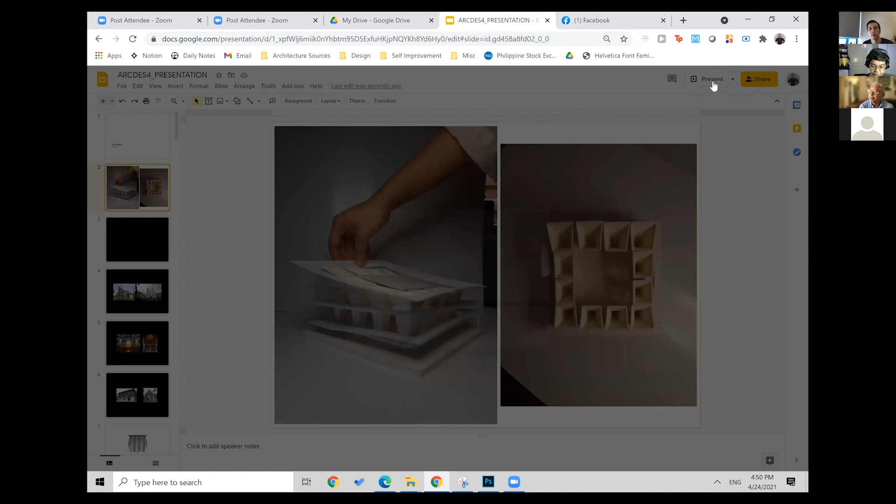Trace, I'm just going to ramble on with my thoughts about your project. You just put up images that you think are relevant to what I'm saying, but there's really no order to how I say my comments.

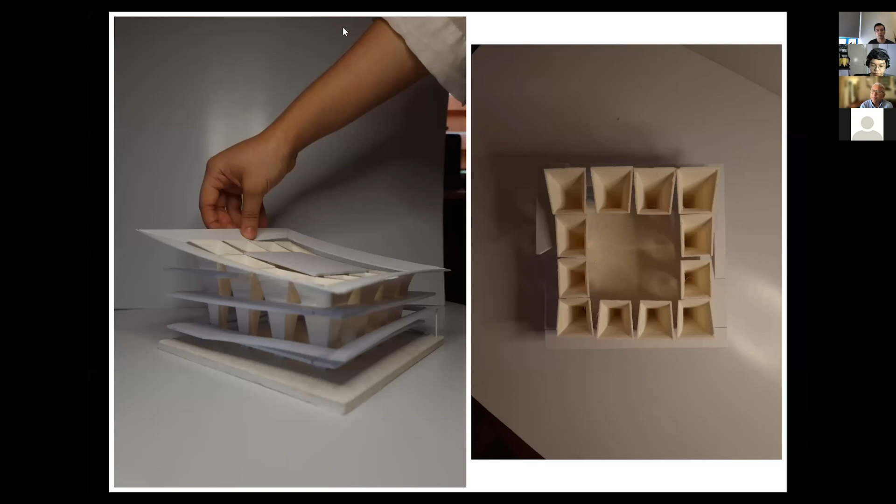Your church, as I said, is going to be like a garden as well. I like that you chose very simple yet hardy plants for your church. As I said at the beginning, the type of plants you choose is crucial because how the plants flourish will determine the success of your project.

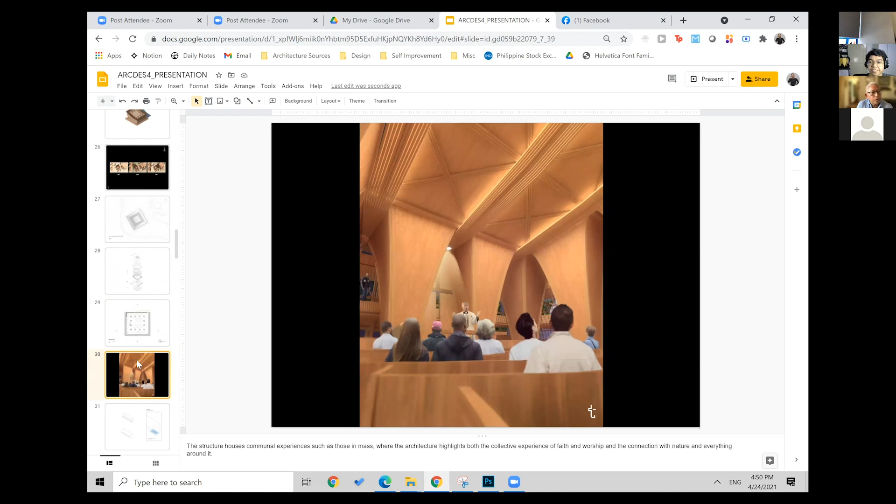I also like that it's open and that you're trying to be organic with your materials. It goes well with your vision of the building as also a farm, and I appreciate that part—also the sounds of bird song.

You showed us five types of bird species. Are these birds endemic to the country? Yes, sir. These are endemic and they're dominantly found around the village.

Every morning—actually my original site was next to my house, and then I transferred to the clubhouse because of the expanded space and the location of the churchgoers, usually originally on Sundays. It's in the clubhouse, so the proximity was just perfect, and I was able to transfer from my original site to the area, and it still has the birds.

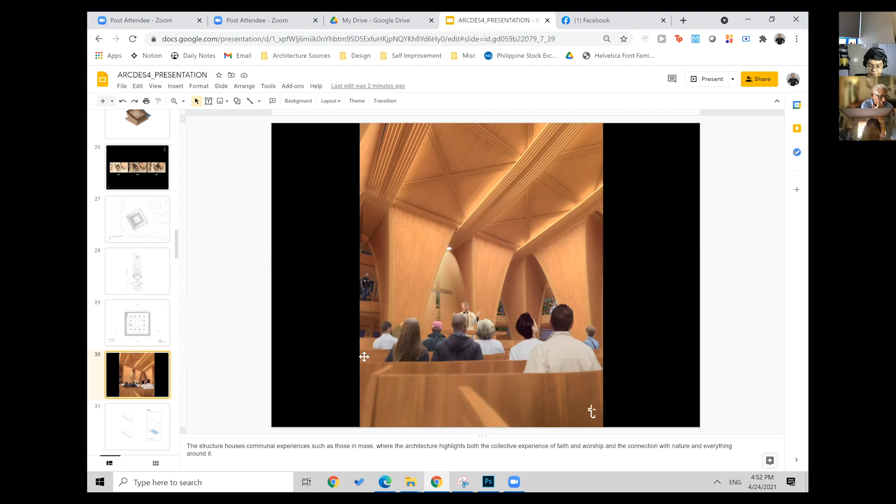Same birds. Yeah, it's good also that you're thinking of preserving rain through your catchment because that can be reused—of course, since you're doing something like a farm.

I like that you have levels in your building as you go up the ramp. There are certain levels that people can sit on if they want to rest, if they just want to relax.

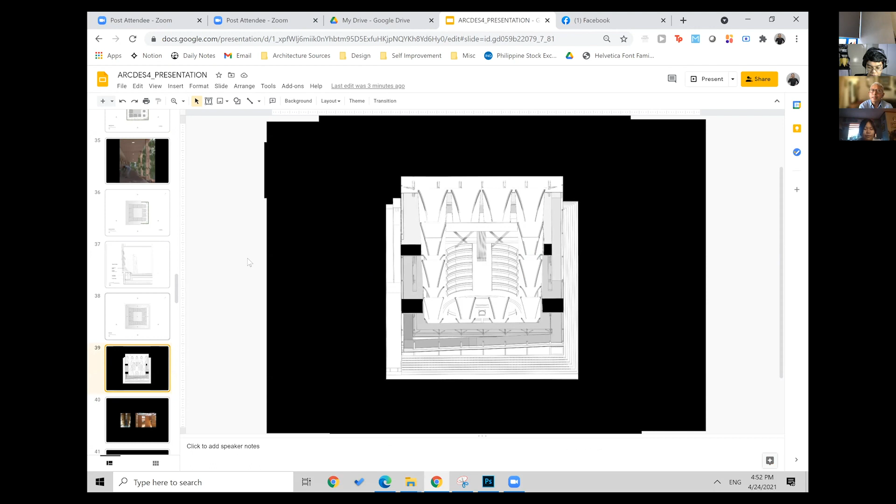It brings us somewhat to a Southeast Asian tradition of the papag, which is just a flat surface that people sit on—sometimes they even eat and do other activities on it. So yeah, I like that you have these flat levels that people can use.

The drainage, the gutter—can we go to the roof system? Yeah, the drainage and gutter design is something I think is quite good.

Do you have that drawing, Trace? Is it an axonometric or the plan on top? This one, I think.

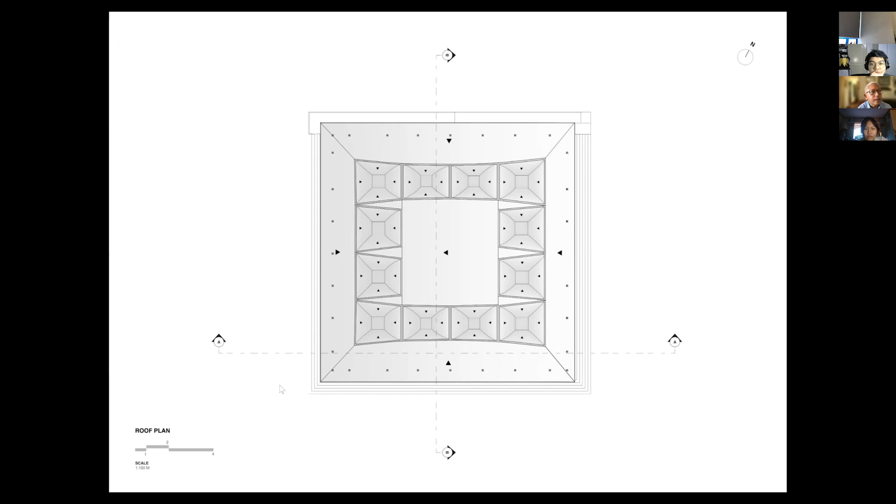Where is it? I don't know if you have a gutter system that you designed. It's here in my notes. Okay, the gutter system—I don't know if there's something specific I should touch on.

Okay, but anyway, now that we're here in this image, I like that idea of having holes on the floor for wind to go through. Although I wish you'd push it further by having more holes, because I think you can still do that.

This reminds me of the community pantries that are happening now. Maybe your building can develop into something like this with the produce that you have.

I have a question about the reservoir volume on the ground floor—is that going to be sufficient for the plants?

I was wondering if the area of the reservoir is not too big for the amount of water you're going to get from the rainwater.

Plants typically need about 25 liters, and imagine having it trellising all the way up—most of the plants heavily need water, given the storage, since not all seasons have rain.

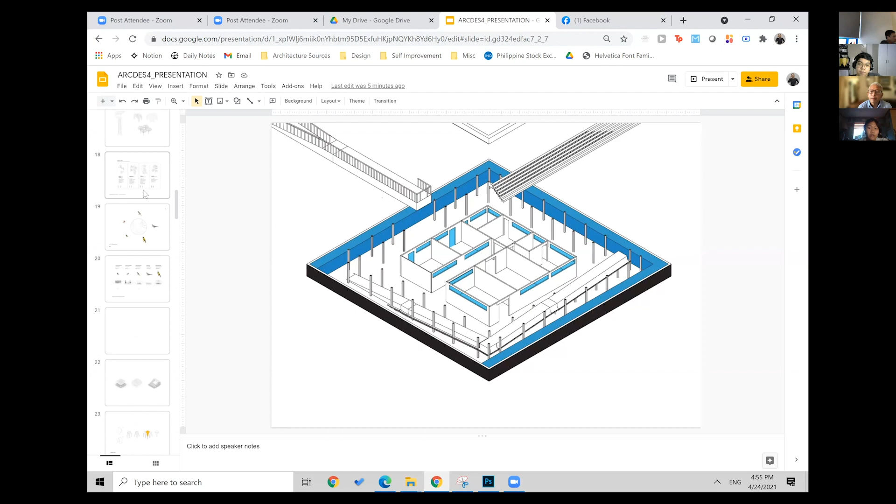During the dry seasons, yeah. So having this as a kind of long-term storage is primarily for the plants—that was mostly my goal for the project, in order to take advantage of the fact that they grow abundantly annually. As you can see, all the plants I picked are local and endemic.

How will the water be accessed for watering the plants from the reservoir?

On the reservoir, okay. Where was that detail? Right here. There was this one drawing detail I wasn't able to express and explore enough.

I was supposed to put in every level a temporary storage system on each floor, so that although it's not fully processed like the water underneath, it could be a way for the water to go around. But unfortunately, I didn't have time to express it in drawing.

Have you thought of using the water in the reservoir for the plants?

Yes, sir. What is your material, Tracy, for the interiors? What is that brown colored material? I was choosing earthen materials, mostly clay, so that it's easily replenishable.

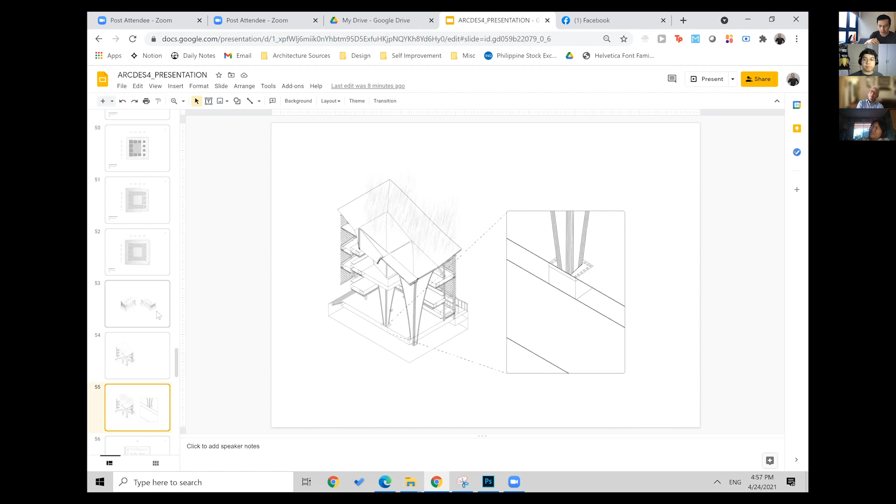The only reason most urban structures like in the Philippines don't use it, although it's used - I remember during times in Manila before, during the Spanish colonization, they used it for the battlefront. So using mud or clay architecture has been there. It's just a little bit more hassle because we have rainy seasons, but it's feasible.

So I wanted to somewhat take advantage of complementing the bamboo with the clay architecture.

So this clay material is more like a facing, a finishing on the walls. Oh, it's not a face finishing - it's the whole thing, the inside. The whole panel is made of clay.

So you'd have to put a structural system into it. Yes. I actually do have a drawing on the structural system somewhere, I think above. Sorry, there's a lot of slides here.

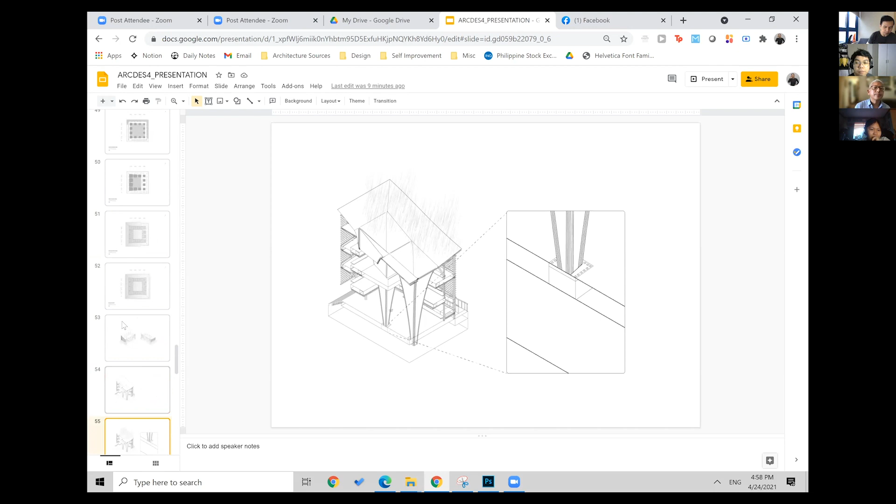So it's kind of the skeletal within the funnel, and then added ribs to further support the arches. So it's a bamboo system, using bamboo and earthen clay.

So you're going to have like a plate or panel that will cover this bamboo skeleton. Have you ever thought of just exposing the bamboo and not covering it? I also have thought of that, but...

Given the time for modeling, since it's kind of a curvilinear structure, I really tried, but it was really hard. Is there a way for you to gather the water through a pipe system without having to cover this? Because I think it will look even more beautiful when you have this bamboo structure that delineates the shape of the funnel.

I'll take that suggestion - the bamboo is beautiful if you expose it. Thank you. I'll think of that.

I just want to add that it's not really new, the idea that churches can be inspired by plants or trees, because the origins of Gothic churches actually came from the idea of forests, and those tall fluted columns and clustered columns are actually interpretations of the forest. Learning something new every day - oh my gosh, I didn't know that.

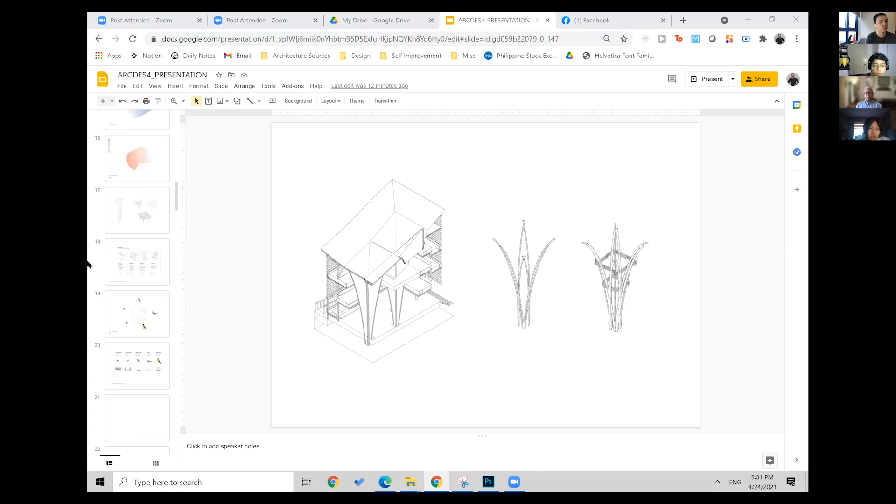Do you have provisions for maintenance of the plants - a gardener, a farmer? Actually, on the site location, I wasn't able to indicate it. The location - where's this? In here, this is actually where the gardeners currently stay.

Within the complex, they usually hang out in this spot because there's a lot of shaded areas with big canopies that hide the sun. So this architecture, being part of the community, also gives them a proper space.

Instead of always just going around the village, there's some space where they could stay or rest. Looking at the site, what is that building to the right? Is that a pool? No, it's actually a clubhouse complex. I was wondering, because nature abhors a straight line, if you were thinking of making your church more amorphous, more amoeba-like in the plan.

The reason I didn't push through with amoeba-like structures is I wanted to maximize the areas of the trellising plants, because once you put it within cavernous spaces, there would be more shade. So I wanted to maximize the square profile, somewhat reflecting the basic design principles of classical architecture. It's kind of symmetrical, but I played with the idea of changing the verticality instead of having it all extremely high, with the curved roof.

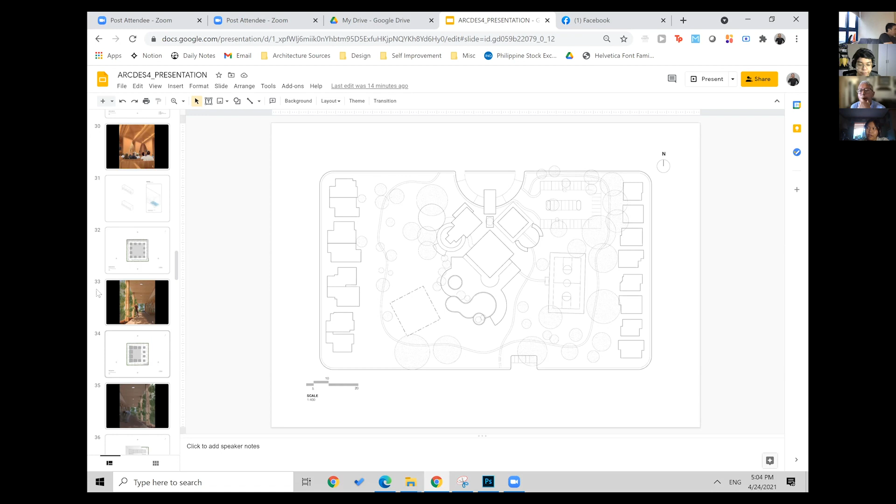It plays a huge role in terms of water collection with its orientation in the southwest area, and also for the acoustics of the choir to carry all the way down. So it's been derived quite a lot from the classical architecture of churches.

You've actually departed from the classical plan of a church, which is generally rectangular, and turned it into a square. I was just thinking aloud if you could have gone in that direction.

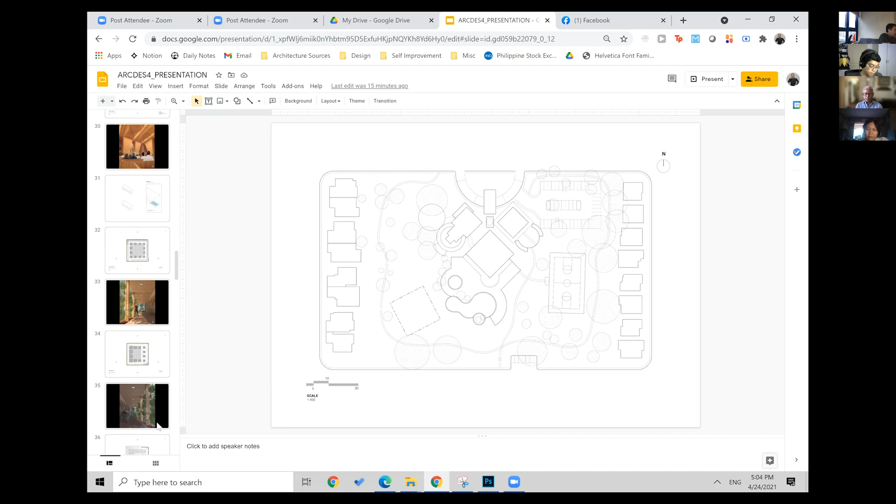Can you show us the groin vault and how it turns into a funnel? This was one of my early iterations, I think the third one I was able to explore first. What happens is there are two planes, kind of parabolic, and when you intersect them it creates a barrel vault, and then the groin vault.

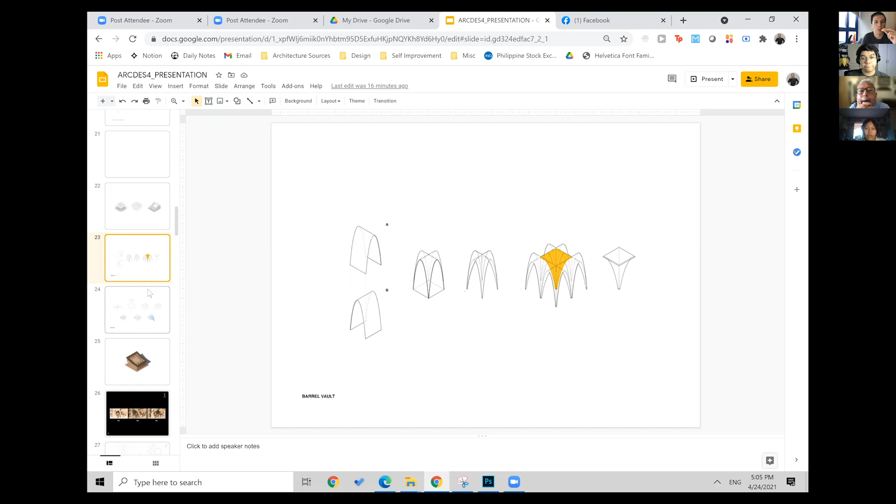I made four copies of these so it could create a funnel intersection in the middle, and then I used that as the DNA of the structure. You can see how I warped it to fit the site context and the prevailing winds toward the southwest area, where the habagat is usually at its strongest with the rain.

What did you want the wind or the rain to do in your structure? Well, it's the dominant winds, of course. When it rains, wind blows in a general direction, so more water can be captured, kind of like a cup allowing water to slide down. I thought of it like taking advantage of gravity for the rain catchment with the form.

Can you hear the water inside the church as it flows down? I don't know, I wish I could put it in — honestly, I don't know how to answer that.

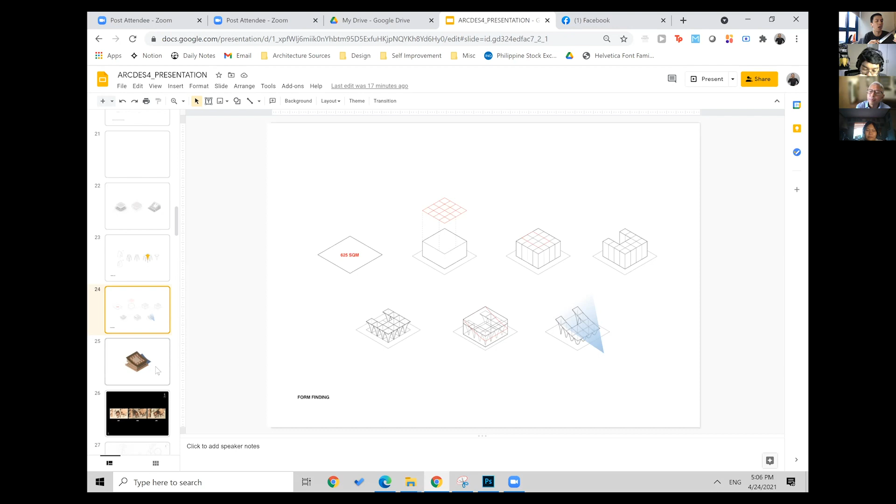But you're already thinking of sounds, right? You started your explanation with bird song and how listening to birds actually relaxes people. So I was just wondering if you thought of that also, since your funnels are right in the middle of the interiors of the church.

I really laughed when I saw your Pew Gardens — you know, when you grow mongo, you're going to grow toge. Honestly, the reason I got into it was in my first iteration I wanted to create some toge pods, like a dark enclosing space to grow that. It was like a huge tangent until it led to the church architecture.

You could have — but if that works, why not? If you can grow food in dark areas, then you can expand that concept outside the seating of the church and into other parts of the building, like the basement, the ramp, or the passageway by the side, so there's still food production.

My comment is just check the weight of the earth and clay if you're going to use that, because that's going to have an impact on your structural design. You also need to check the cantilever system that you designed.

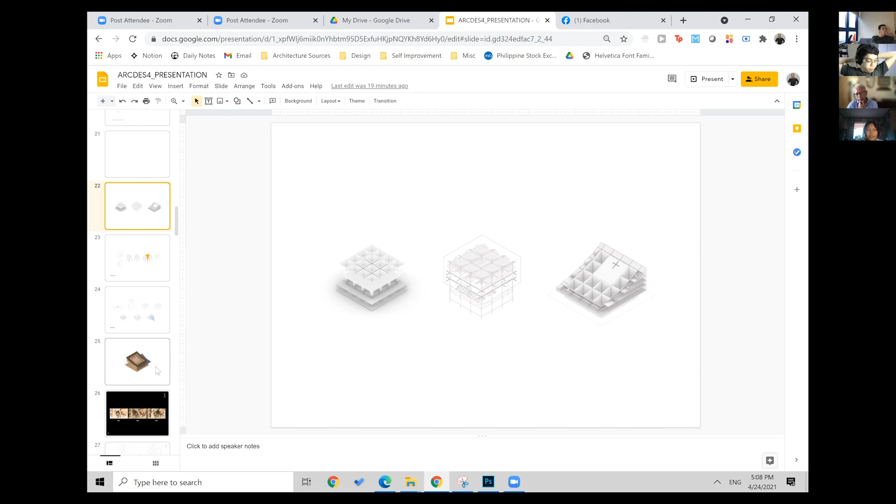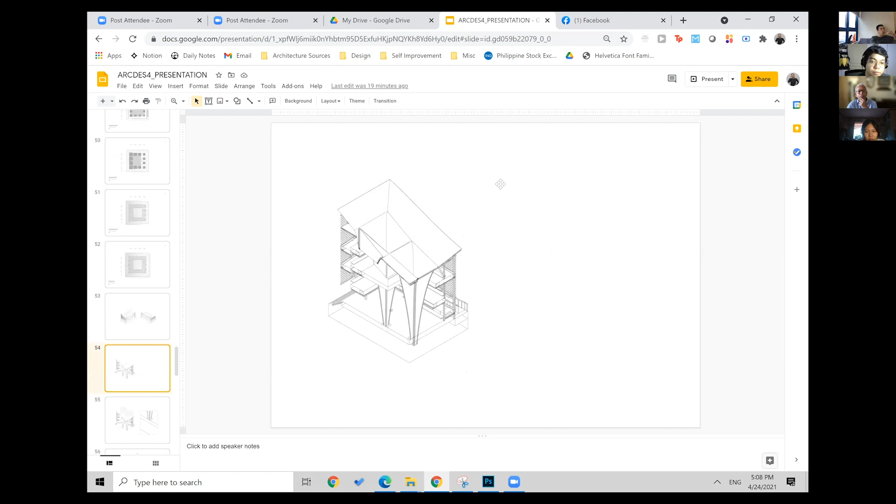Can we look at the cantilever system? Okay, so if you're looking from this, the reason why the presentation of the boards is kind of long is mostly because I was expressing each of the locations of where the poles are going to support the entire structure. How can I show it? Where's a good view? Maybe in the exploded view, or you could see it in the elevations.

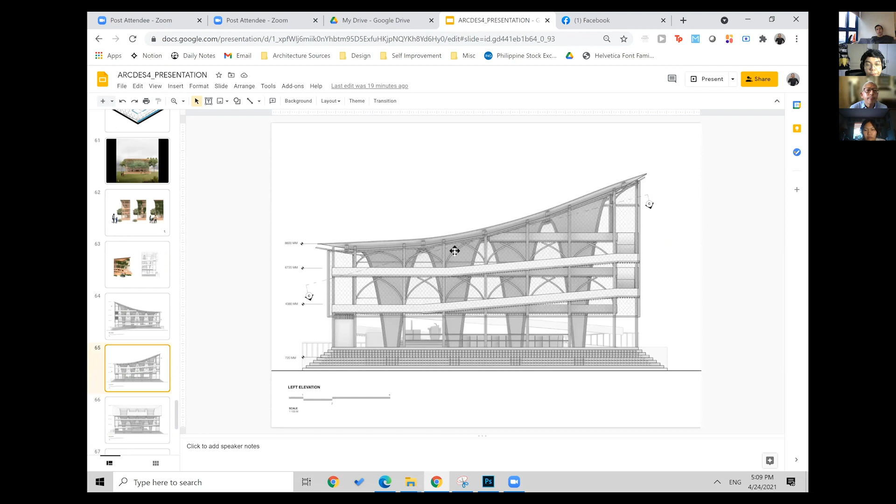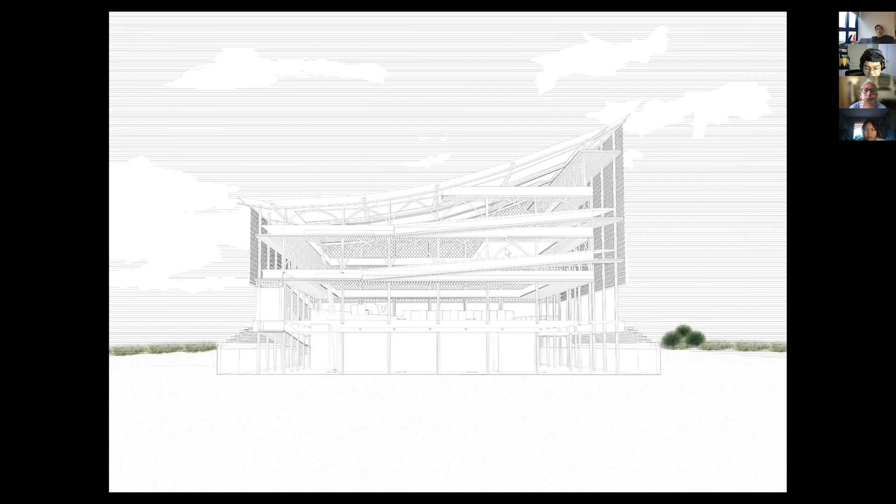There's a bamboo that goes all the way down, on each side, even on the inside. Maybe I could show the axonometric here. In this perspective drawing you could see it goes all the way down, allowing it to support the cantilever that goes beyond the arches. This is bamboo from bottom to top.

These are bamboo poles. Are you sure we can get bamboo that's long? Usually what they do is they segment it, so they lash it together. That's how I could imagine it if I was able to detail it further. I wish I could, I would have done something like that.

Your main structure is the funnel, right? Yes, it's the funnel, and because there's a cantilever, I think it will be able to support just the walkway alone, but that won't be enough for the ramps and the trellising pot systems. So there was a need to somewhat extend from the main support. Although it's really strong, it's better to make sure, especially knowing that the Philippines is an earthquake-prone country, it's nice to add the tensile strength of the bamboos as it sways, as a further support.

Well, I think it's great to start exploring in that direction. We're actually among the last of the Southeast Asian countries when it comes to exploring bamboo in our architecture. It's great also that you've thought of the disabled and the elderly for your project.

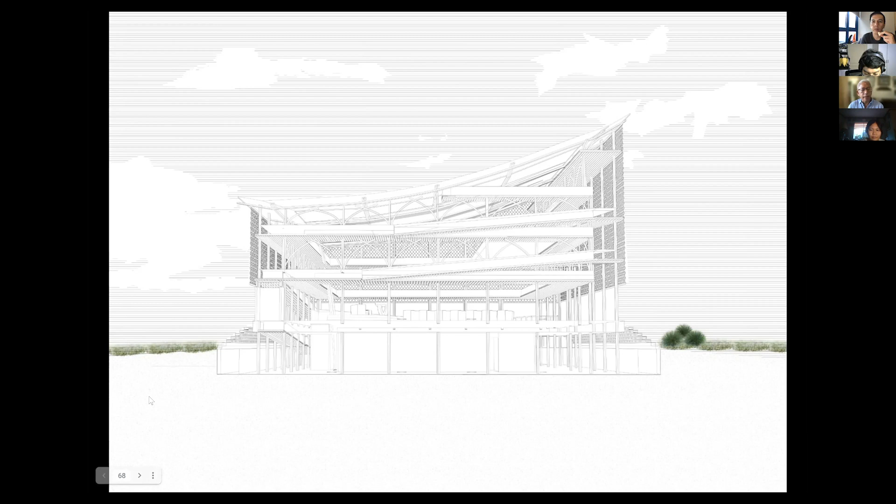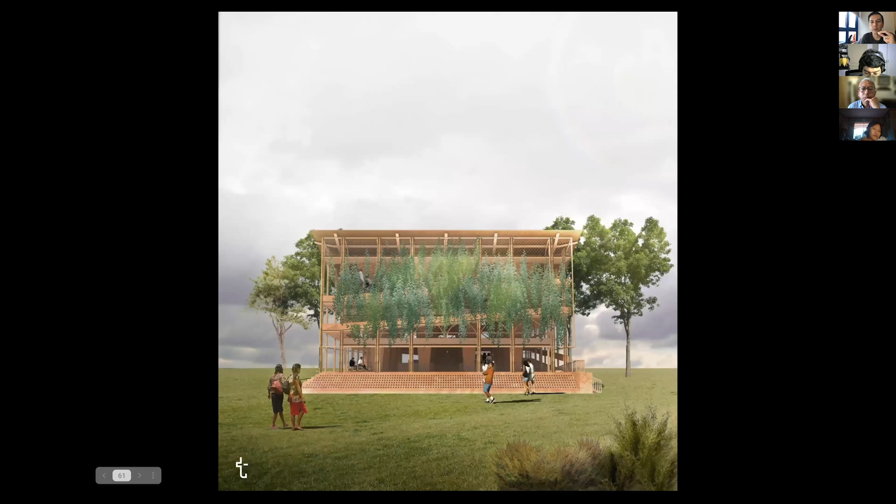Is the reservoir open? Is that something people can fall into? It should be, the way I see it, it's somewhat enclosed, so they won't fall into it. It's within the edges, but the lower end of the basement.

Just be aware of pests and mosquitoes. Yes sir, that could be a breeding ground. So maybe just put fish.

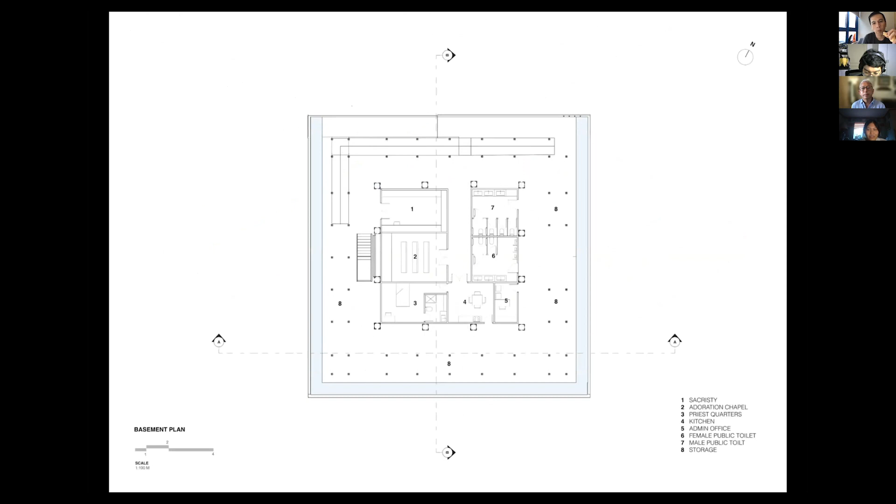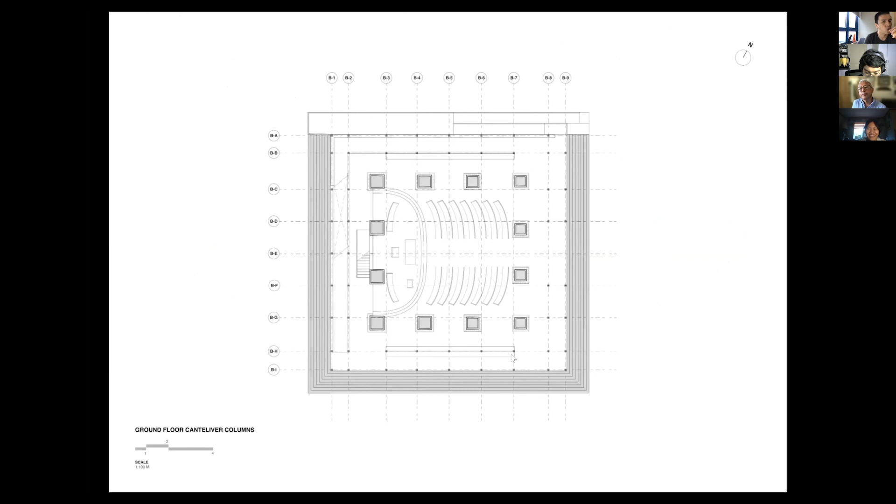Is there a theater area in your place, or a place where you can put up a market? Yes, I wasn't able to express it well in the drawings. Is there a good photo location to show? I didn't show the detail quite well, but it's kind of seamless to the design right here. I wish I did a perspective section, but maybe next time.

Um, the open areas, I don't know if you can also think of continuing the farm on the ground area. You have a huge area on your site that's unused. If you can continue the plantings there, I don't know if that's against the brief, but I feel that if there's ground you can use to continue planting, why not?

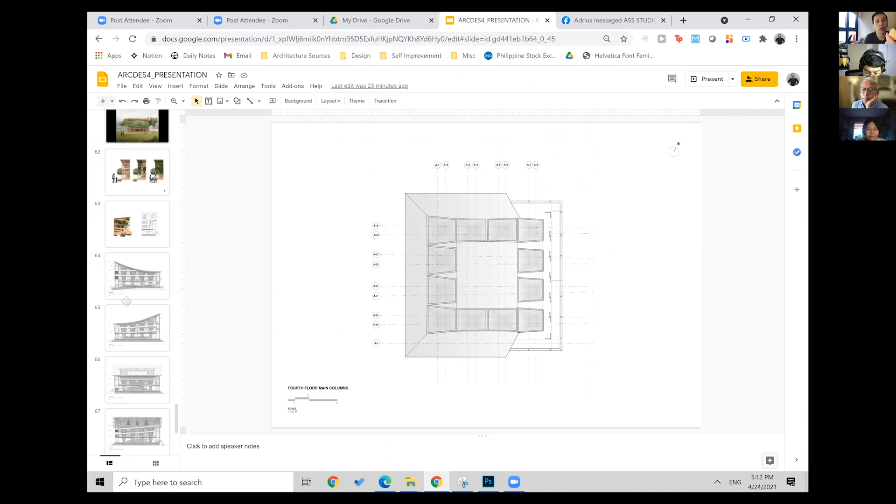I'm also thinking of the big area that's with informal settlers. Did you think of what the relationship of your church would be to them? Because I did think about it, given the proximity of the location of the church, because I remember during the pandemic.

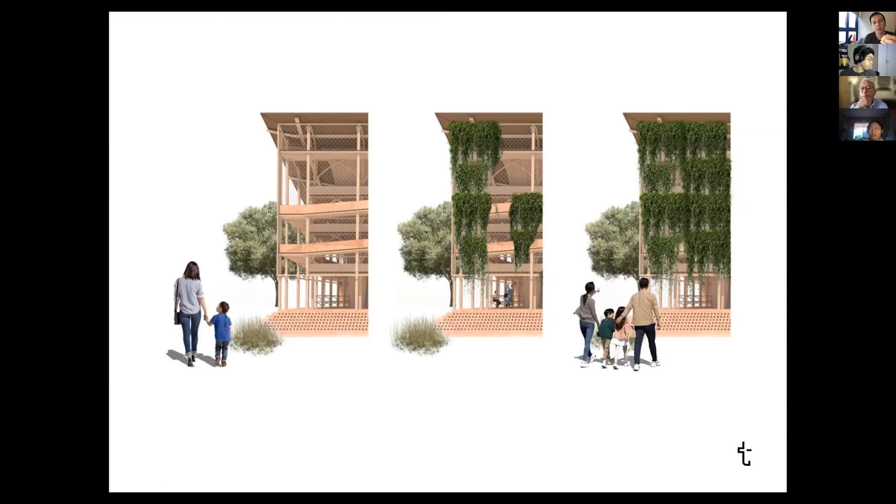We did somewhat help them give food since they're kind of like our neighbors, especially at the start of the pandemic, and that kind of sparked some ideas with the location and the idea of the trellising architecture that is dominantly using local fruits and vegetables. So imagining how they establish this connection, like breaking the barriers between different classes, kind of helps with the relationship with the people.

The fact that you decided to do a church means it's one of the last remaining typologies that actually cuts across classes, because everybody's welcome to go inside the church. But you have this huge illegal settler area. Maybe you should think about what the relationship of your project to them could be, and how that can be enhanced further.

That's why I thought of a marketplace, or a place where there could be community pantries, something like that. Thinking further, what happens when you harvest?

It's kind of seen a little bit in this render elevation as the experiential architecture happens. If you look closely in the background, there's like a stand behind the person seated on the stool. I imagined, because when going to markets, there's usually a tier wherein you could put your fruits on top of a long table, and then they could just remove it. So it's not as obvious.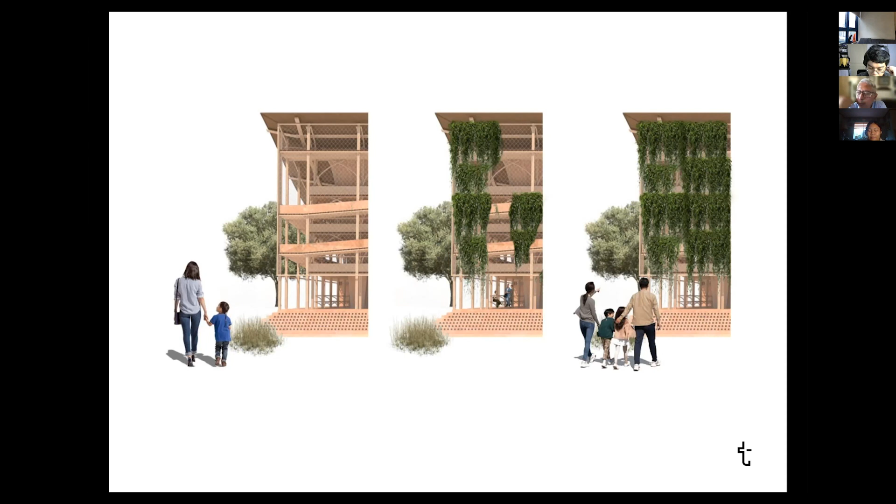I think, Trace, the fact that you chose clay, you can explore that further. Clay is one of the oldest building materials, but even today in places like India and the Middle East, the idea of creating screens of interspersed clay elements, whether bricks or wall panels, to filter light, is something you can explore here. The fact that you created a ventilation system for the lower ground is right, but as I said earlier, push it further by creating more perforations in the floor areas.

I just want to add, if that's okay — within the structure, I remember talking to Sir Jim about the clerestory in Filipino architecture. It's expressed all the way throughout here, to maximize the ventilation of the outside breeze into the interior, and it goes through almost every corner of the basement area.

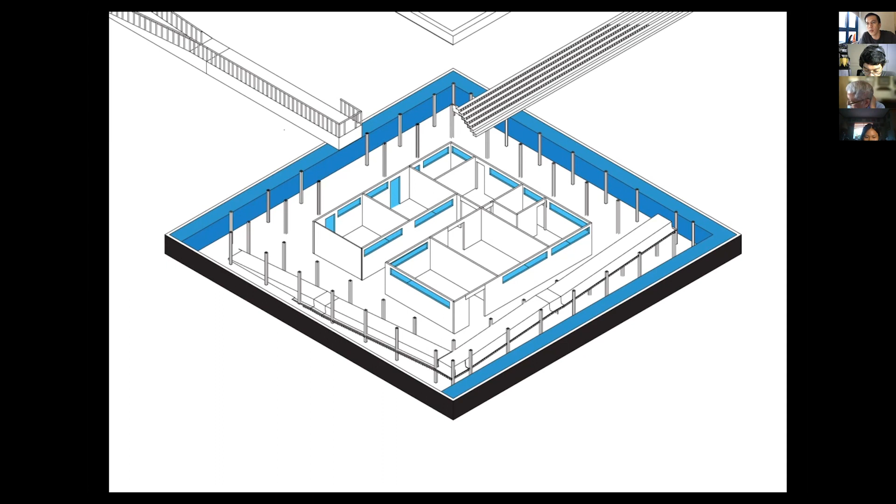Okay, so to end my feedback — it's great that you've combined this. I like the choice of plants, I think that's very practical and realistic of you to choose these. I think they can grow with the system that you've designed, which for me is important. You just need to tend it — be aware that plants need tending and maintenance.

I do wish you'd explore further the footprint of your building from just a basic square, but it works somewhat. And the idea of using organic materials is, I think, my favorite part of your project, because that really is something we should start exploring.

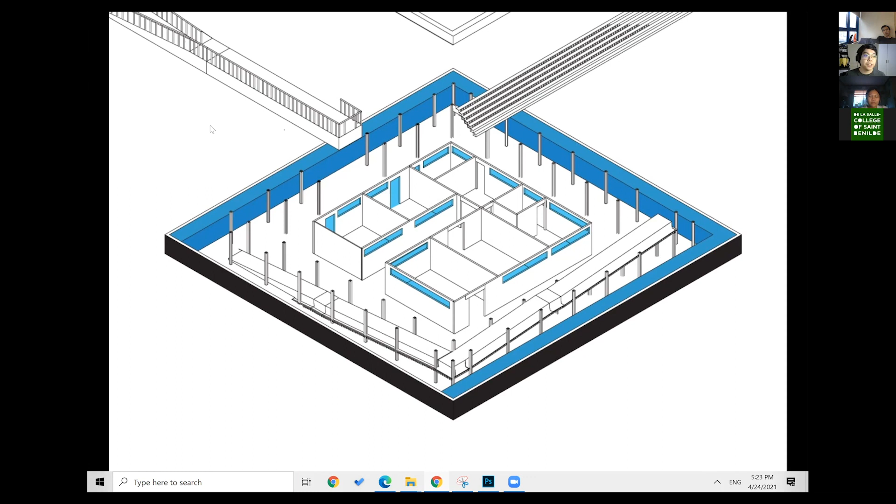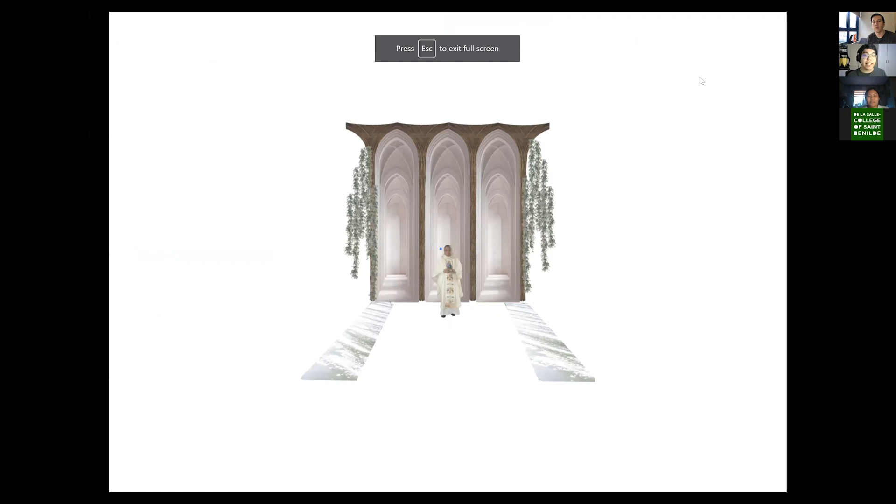So maybe it wasn't the storytelling on how the hybridization was interpreted. The collage is also a good way to express an experience, and you're the only one who showed a collage that way, with a priest, and plants behind. So it was like, oh okay, I get what she's going to do with the architecture. At that point, without seeing your architecture, I was already very excited to see it.

That's what can make people interested in your project, you're talking about the experiences you want to create, right, and that is your selling point. After you sell that, it depends on how you translate it into the architecture, which is the experience you are imagining, that's what you're designing, and then how you execute it is already another skill. So what we really need to take away here is designing the space we want others to experience, and then how we communicate that space. That's why I'm very into the storytelling, those are my points.

Okay, so for the parameters of your architecture, what you said about having birds, sunlight, water, that was a good precedent and premise for what you're telling, what you're narrating. That's a very good jumping point also, you're saying these will affect my architecture, now I'm wondering what the architecture will look like. So there's room for imagination, like one plus one equals three.

That's storytelling. So I'm still not sure what's the better way of telling your topic, since I already knew the start - you found the lot, you saw the birds, you found a certain plant, things like that. And then having an idea to marry this with the chapel, or the other way around, where you talk about the chapel first and then talk about nature. I'm not really sure which is the better storytelling way, but maybe the way you said it is already the good way of doing it.

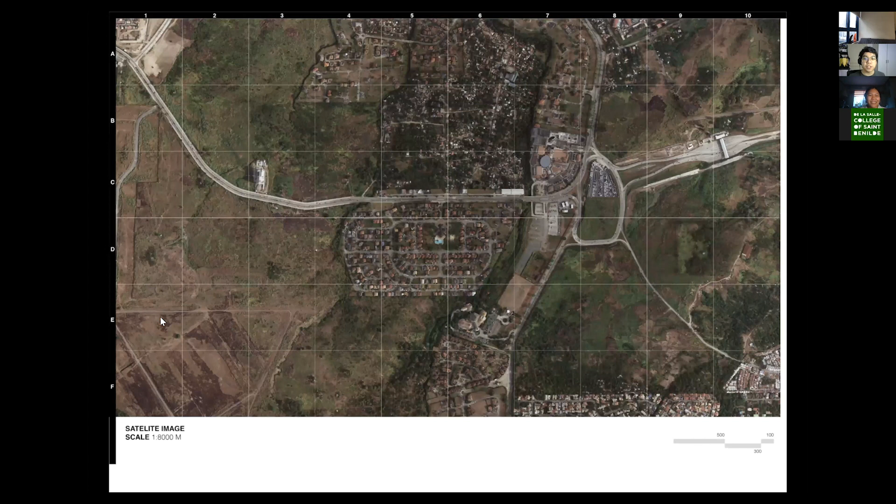I saw it, and I said I hope you tell the story this way - rather than picking a singular plant, you make architecture for different kinds of plants that will take over the structure and thrive, rather than me expecting just one plant in the architecture. So that's what happened with my expectation - I thought it would be just one, then suddenly it was several plants. Okay, so that's that.

And then, seed dispersal - I should see that when a spot has seeds dispersed, I can imagine the plant growing in that spot. I just couldn't imagine it being dispersed and growing in the certain spots you mentioned the seeds would disperse towards.

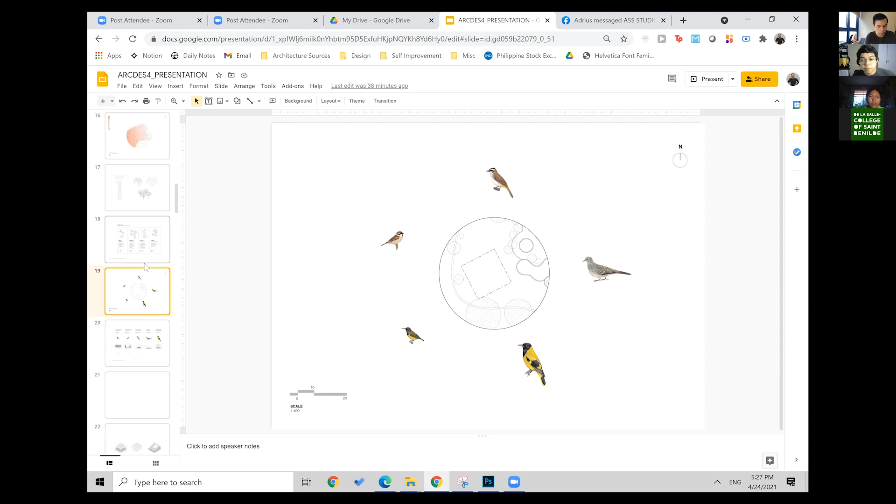About the birds, it's kind of the way I saw birds as part of the narrative - they're unpredictable, not knowing exactly where they disperse seeds. Of course, the way I see the architecture I created is mostly curated, obviously by caretakers, in order to maximize the needed parameters. As you can see here, there are certain rows of spacing.

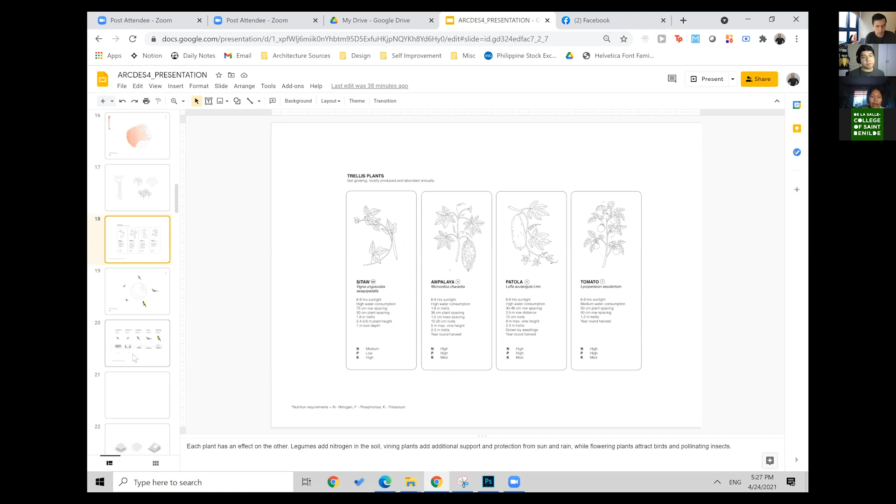Root lines and height, which I dictated for the architecture, especially the ceiling height. Normally, as I mentioned, the ceiling height is 2.4 meters, but here it's 1.8, so it's easy to grab. And given the ventilation, it's not that hot.

Since you mentioned that, I was actually wondering about this too - I have one point here. You said 1.8 meters - for example, if I provide a 3-meter height, but the plant can only reach 1.8, what would happen with the plant?

Would it still climb further, or would it stop climbing? It could climb a little bit further, but I think it needs a bigger pot. So if you put a plant in a plant box, unlike putting it straight into the ground, it won't be able to grow more root systems and everything. But it's about the maximum so that it's easy to grab. Okay, got it.

So, species and sound - you said that study was interesting. I hope the way you tell that story is flipped too, because you were explaining what you researched in a very factual way. But I hope the endpoint - about it being calming - comes first. Perhaps you can say this is an element to create your architectural experience, for added spirituality.

So these birds actually make these sounds according to some studies that were done like this - that should be the end of your disclaimer rather than the upfront statement. They say this, and then I think, okay, so what if they said that? That's how it comes across. So at least here, I imagine having calming sounds, and the birds are perfect for that.

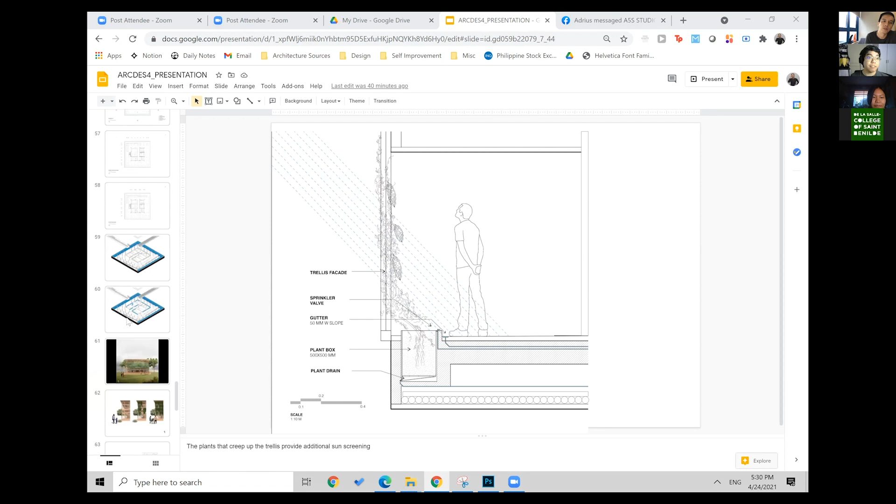That's very interesting architecture and the roof is really catching the water. So you could really see the intention of wanting to catch the water. And it is very important that your architecture is very, very legible. And that was extremely legible, much like yung ginawa ni Land.

So yung mga may nagsabi na may water collection system sila, I'm not saying it should look like this. I'm saying it should communicate as clear as these examples kay Tracie and kay Land. So that was very interesting kung paano nangyari yung roof mo.

And it's also very nice yung system na galing sa roof mo, it affected your interior space. Much like dun kay Lance, yung kanyang funnel experience, yung interior space. So it's very holistic also in terms of the approach.

So hindi kayo parang tinago mo siya. It really is what it is. So that is very good and very clear yung ginawa mo.

So tinanong ko, yung isang tanong ko, why isn't, wondering lang ako, why isn't the plan of your chapel or church like a church-like plan na cross? Oh okay, so the reason why I didn't make it

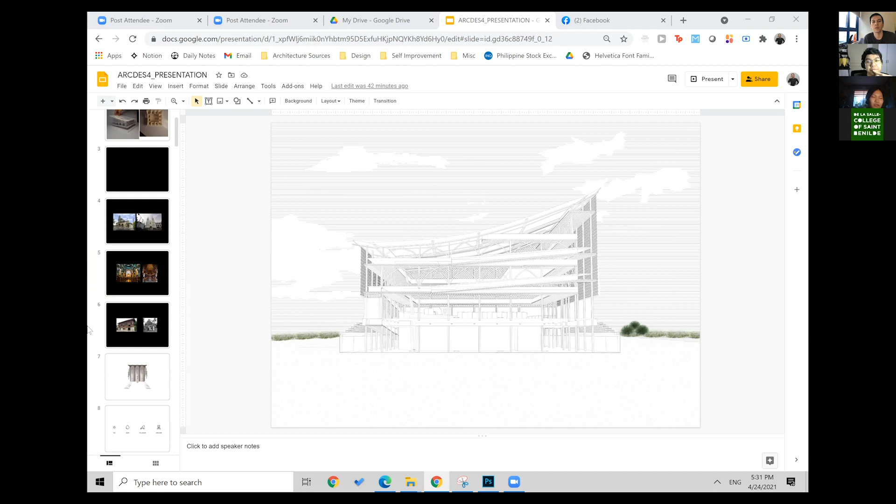a church-like, I wanted to maximize the area, given like it's not as big as a cathedral would be, and it won't be as grand as that. So in order to maximize the way I thought of it, like how can I maximize the space? Okay, square is kind of the go-to shape that allows me to play around, knowing that

I'll be using trellising plants. It will be enveloping the entire structure. Because if I cut it into rectangular parts, there are places where there's gonna be shading and some plants won't be able to grow. So that's what I initially thought of.

Kasi you could have explored also other ways, other forms, if iniisip mo yung light. What if it were like somewhat of a thin building, a very long thin building, since your site is big, di ba? It could be parang a very long thin chapel. I mean, that could also work.

I don't know, ayun, so maraming possible na, I also wish na maybe I would have known na probably explore para makita na marami kasing possibilities dito sa program na ginagawa mo. I'm not saying that it has to be a cross, di ba? It was just asking why isn't it the other choice? Why did you pick that choice? So yun yung question na yun.

Anyway, moving on, describing your architecture and experience is one of the storytelling methods that I've been waiting to find in the studio. So you were one of those that managed to do that. You really managed to tell the experience and say what you want with architecture. It's not about having a provision for this or that, it's about experiencing this and that.

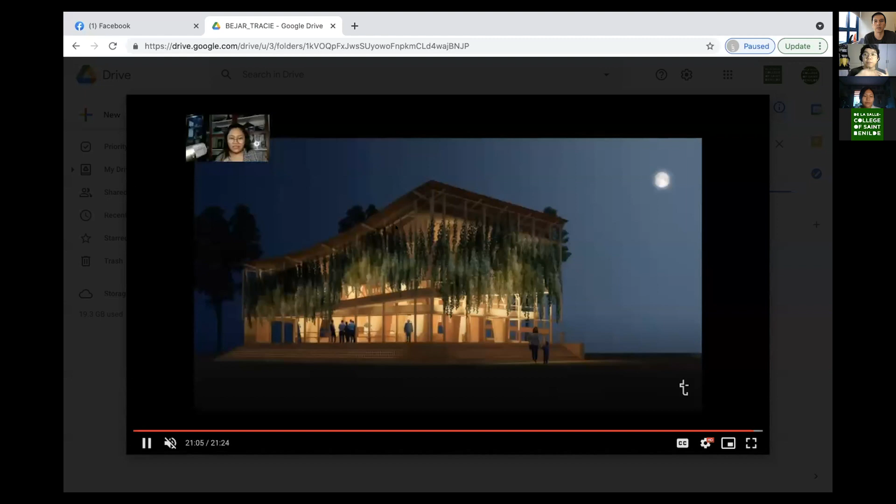Okay, so it's not showing Tracie's work, it changed. Anyway, my next comment is I think a little bit more push could create an otherworldly experience, although the project is there already. It's not lacking, it's just that with a bit more, it could reach another level entirely, like heaven.

Can you guys see it now? Okay, I already asked this one.

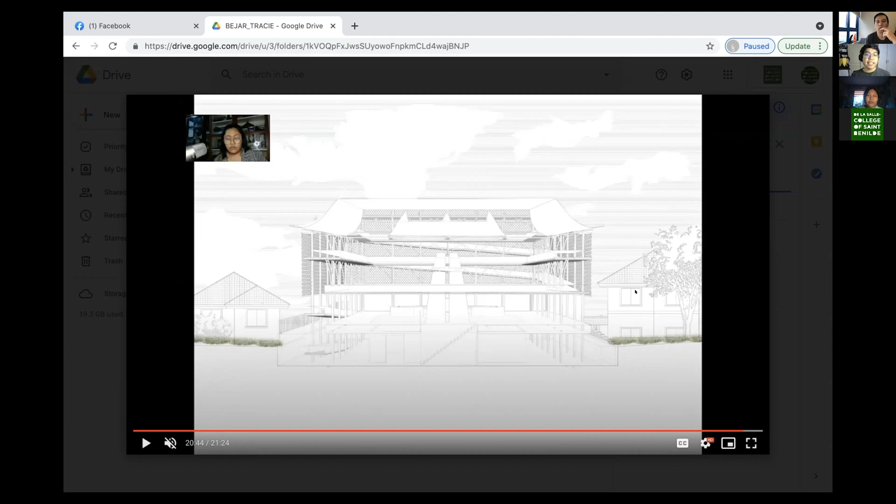The diagonal section cut drawing is very confusing, I don't know how the cut is. I'd avoid that. Just stay with the usual ortho drawings, isometric and section views, so communication is easier. Don't just show a flat block sliced with a flat face drawing, it's very confusing without shadows. With shadows it's much clearer. The effort on that drawing is wasted if it can't be understood, so we should work smart.

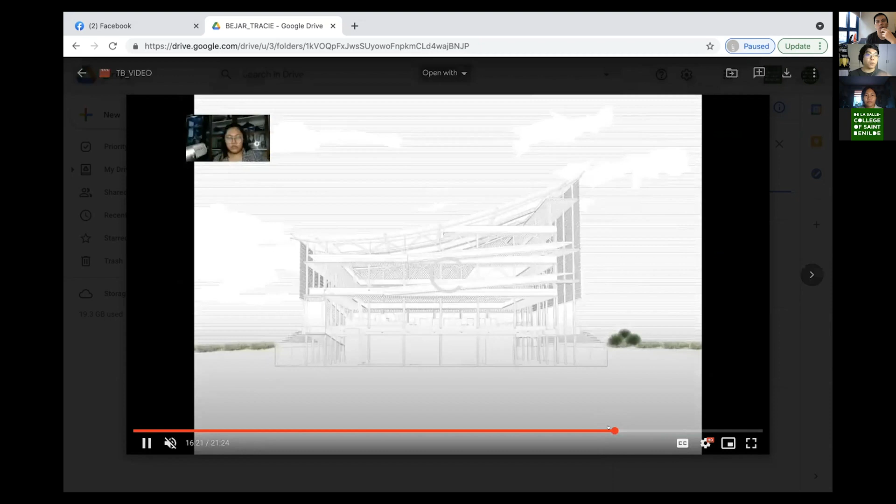For your water collection using earth and clay, I think the materiality is nice, honestly. Is it ideal to have clay for water collection? I'm not sure if that material is okay when it rains. The material you were pointing out is actually called rammed earth, so I'm not sure if rammed earth is okay because it's usually dried out, and I'm not sure what happens if it gets wet.

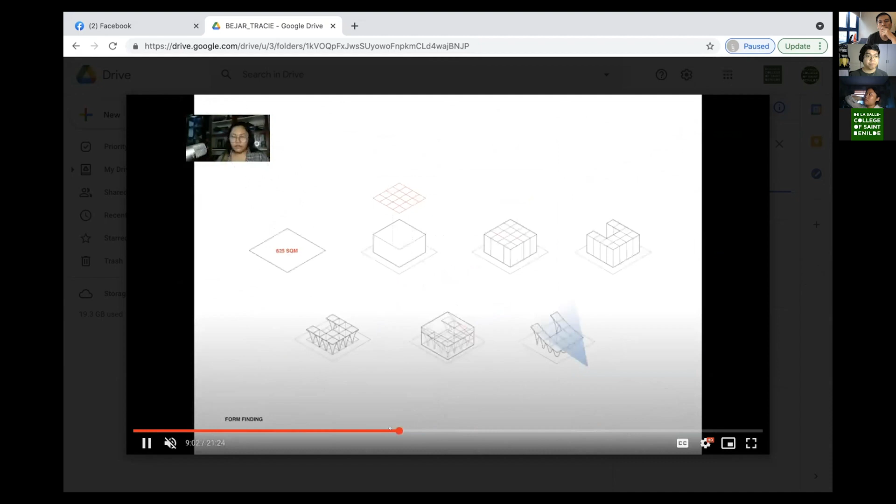So I think maybe a little more research on whether rammed earth is okay to get wet, and what people do so that it doesn't get moisture - they put finishes. One of the finishes I was proposing was a limewash finish.

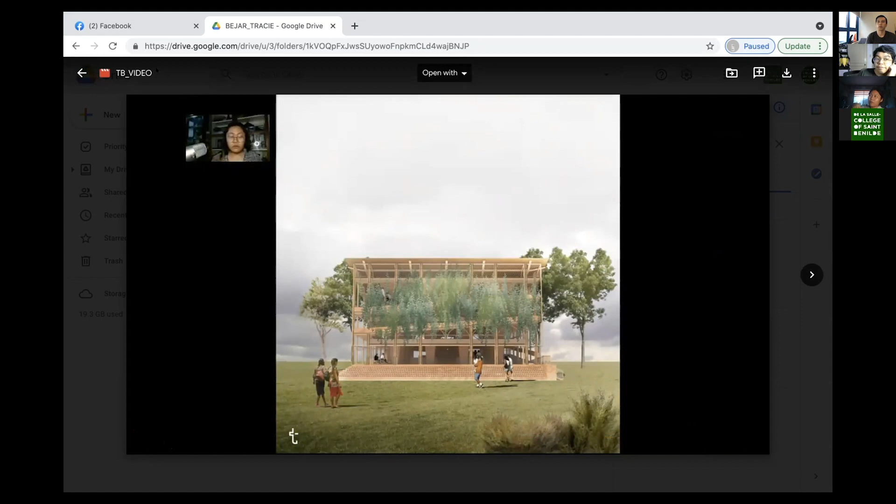It's a white reflective material that could be placed in the center. It's not cladding stone, it's just a finish, a mixture with limestone particles. It's a wash that's been used ever since, like Greek or Roman times. It's a natural white pigment.

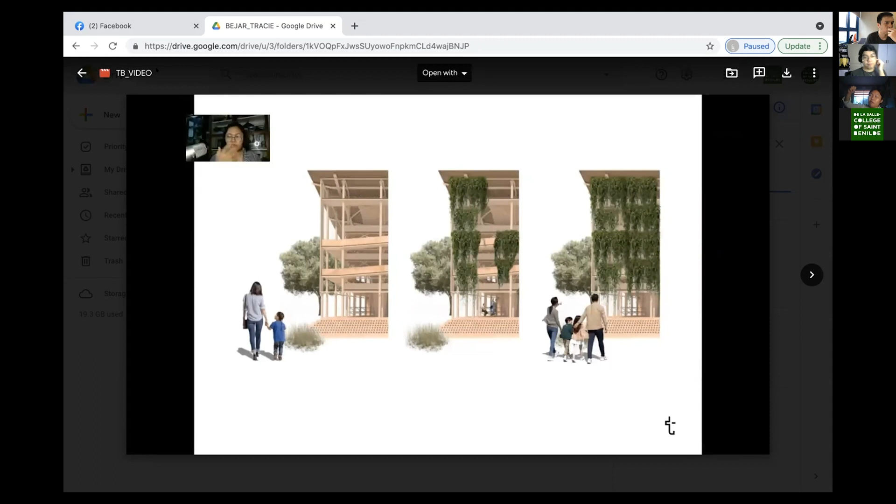If I had rendered it with white interior funnels, maybe I should have done that. The advantage is because it's really hot in the Philippines, and when the rain comes down, it already has antimicrobial properties. So imagine that, and then processing it further at the bottom to produce cleaner water for the plants.

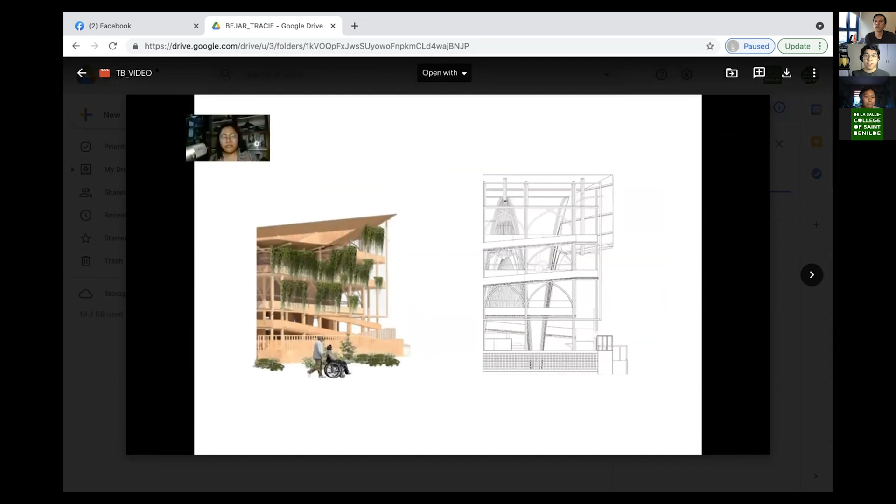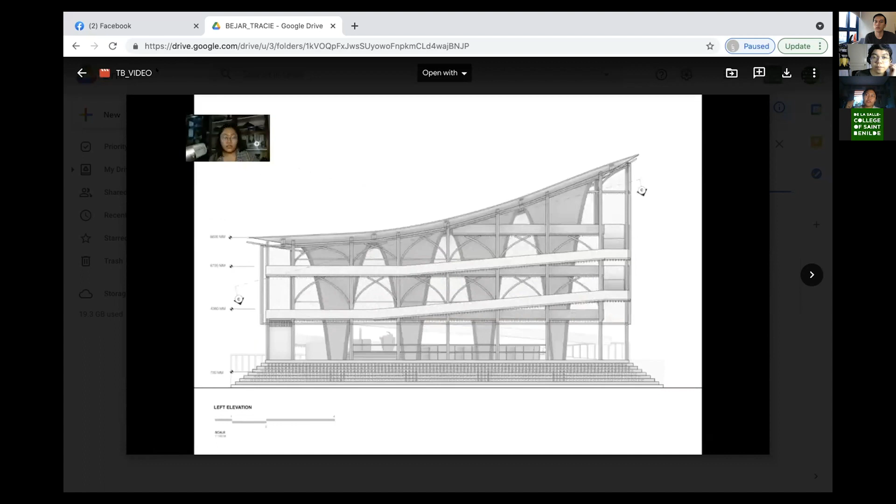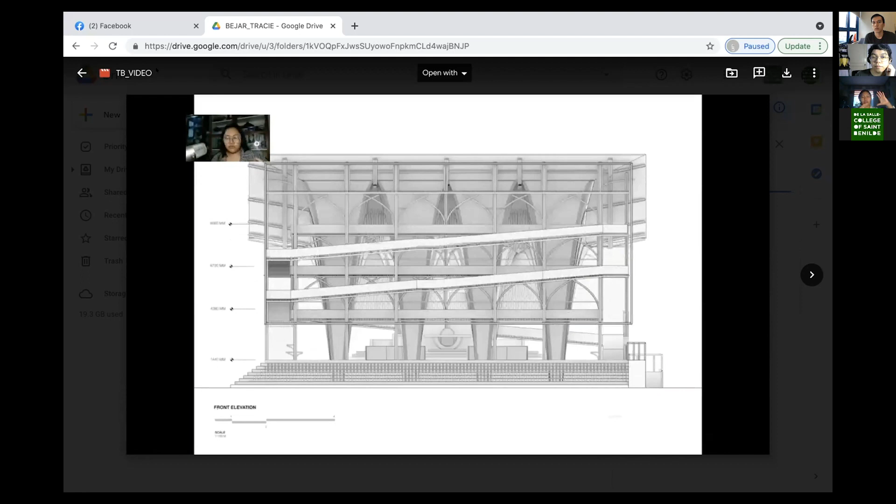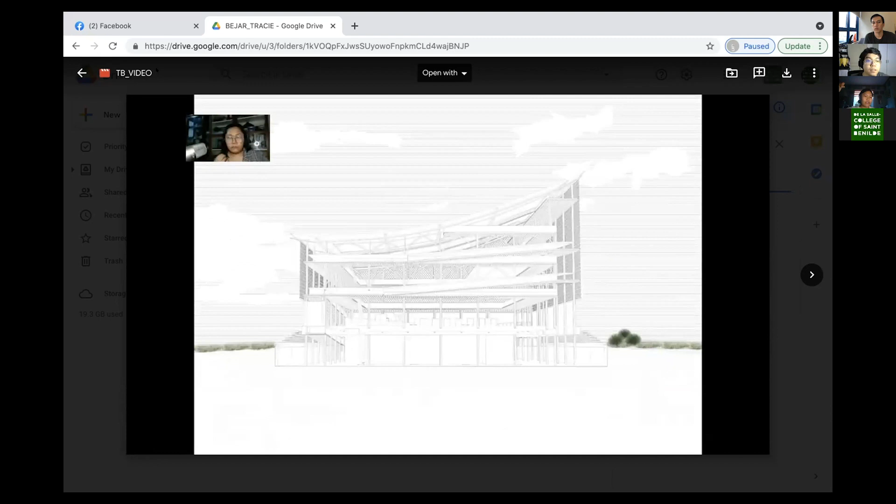My next question: is there a reason why the structure peaks on one side versus the other? Yes, as I mentioned, this is oriented toward the southwest corner in order to catch most of the habagat, the rain, during the stormy seasons. Also there's a choir space, so putting the altar space at the lower end actually helps a little with the acoustics, and then going down is the choir space on top.

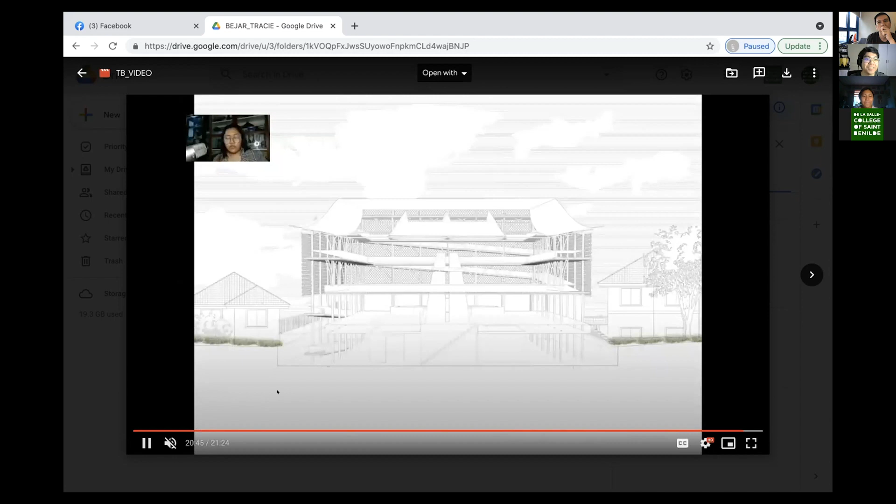That's a very good point, I forgot about the birds. Where are they? During the presentation I thought about it, you mentioned the birds but then they disappeared from the presentation. So this is just a note: when you tell your story, don't leave some elements out.

I appreciate the detailing that you're doing. Although I hope the parts that you showed me, the pieces, the bits first, and then they come together. I think that's the possible improvement on how everything is. Because what happened was, okay, this is the space, it's already built, and then you were going on different parts. But maybe if you showed how all of these connect together and then showed the final product, the experience of the storytelling would be better.

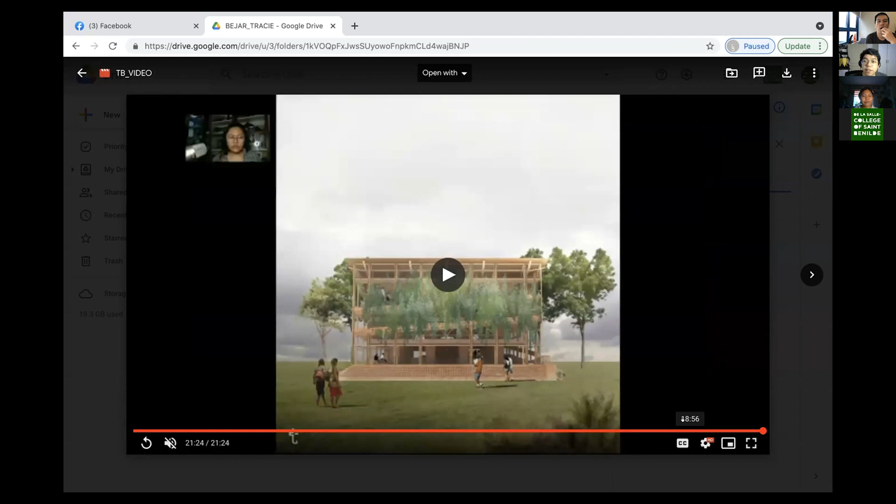Although I feel in your renderings, the interior of the church, I couldn't really see the naturey feel. It's very brown, earth tones. I don't see the plants. So I was really hoping that in your vaults or funnels, some plants would grow hanging there, so it feels like you're entering a rainforest. Then in the middle of your rainforest, it's actually a chapel. That's one part of my comment.

And perhaps, I guess, if you had added different plants that can stand less sunlight, maybe I should have explored that more.

It's like the exterior didn't really follow through to the interior. That's true - the reason Sir Jerry pointed out how it would have been better if the bamboos were expressed on the funnels. It would have been more expressive, and you could really feel the texture of the entire building. So it's not just about the plants, but also about the entire experience of the building, following from the outside to the inside.